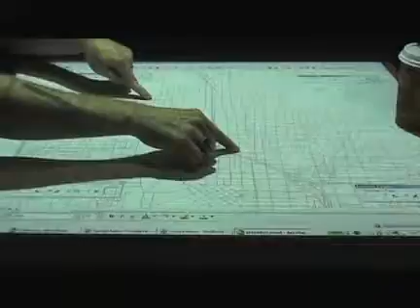So this is the DiamondTouch plug-in tool, and you can see it's integrated right in. With that plug-in tool, we now have some iPhone-style two-finger zooming, or this is a pan gesture. But the interesting thing is that multiple people can work at the same time. Oh yeah, you can pan too, right? Okay, yeah, that's pretty cool.

But if you drag one finger around, you'll see that I'm putting down a road, and he's putting down a path, and you can do this at the same time. You're putting down a bus line, or I can be putting down these highway markers here. And he's got an area tool there. So we can all be working at the same time here.

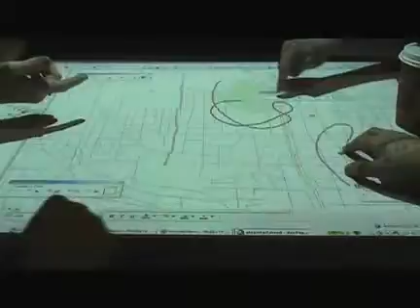And what's happening here is, you can see over here, there's a database. These aren't just graphic elements. These are actually features that are being geo-registered, but they're registered by user.

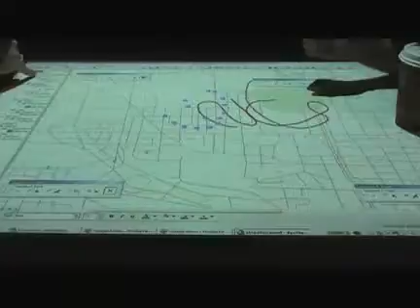So for example, I could turn your layers off — if I can just borrow the mouse for a sec, sorry — and just look at the stuff that I did, or turn mine off and look at what you guys did. Or we could even build a timeline. Everything's time stamped, so that we could build a timeline that takes a look at this interaction session over time. Huh, that's pretty neat.

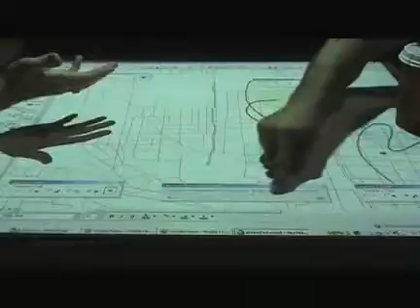So that's kind of what we've done for GIS, and our plan is over time to come up with plug-in tools for other markets. But I like GIS because people tend to work in small teams, and I think it's a natural fit with the multi-user capability of DiamondTouch.

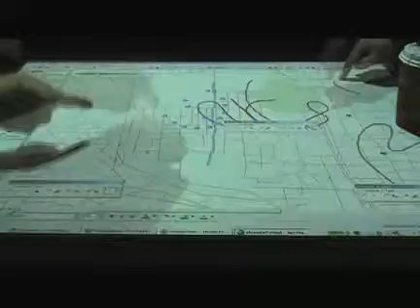Oh, here's an interesting thing. So here's my delete key, right? So here I can delete my stuff, but I can't delete things that other people did. Huh. Because there's a record as to who said what, right?

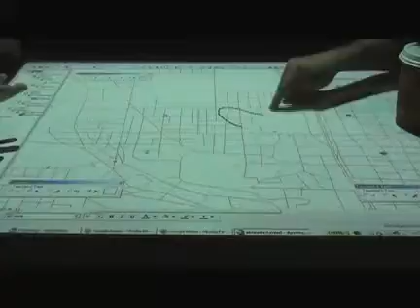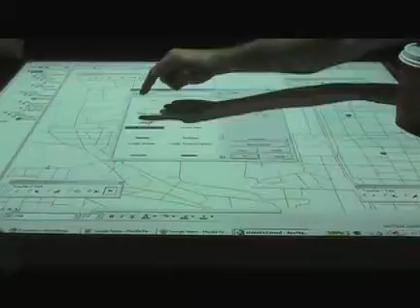So one idea is like if this were a planning session, a town planning meeting or something like that, and somebody said, hey, there ought to be some sort of handicap facility right here. Three weeks later, you could have a record as to who authorized that, because again, we know who did what. I can see where this would be really beneficial in like a command and control military type situation.

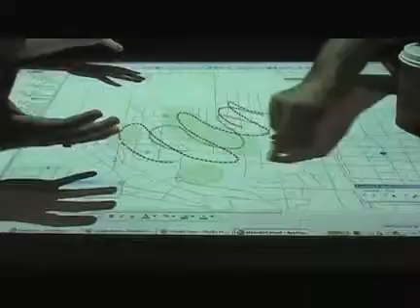That's where we're getting a lot of our traction. People who want to make decisions — this is where the decision making takes place, at a table like this. People tend to work in small teams around a horizontal surface like this. And by enabling everybody to work at the same time, you don't have to take turns. It makes it a lot more natural of an interaction.

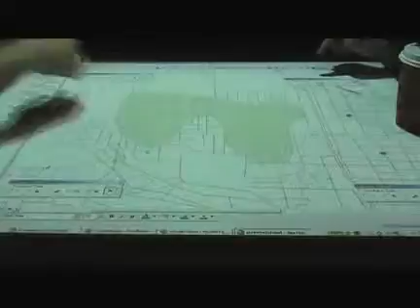So is this the largest table that you guys make? It is. We have two standard sizes. This is a 42-inch right here. We also have a 32-inch diagonal. The reason we chose these sizes is our target is small group collaboration, and here I can reach everything.

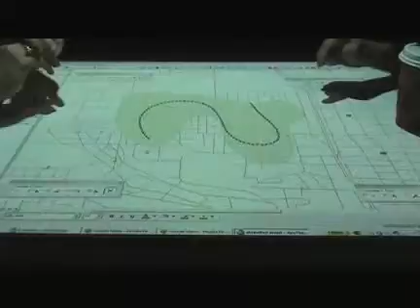Now, we have talked to some people from the intelligence community about making a great big one, and it might be that down the road we get a contract to do that, but right now our target is small group collaboration.

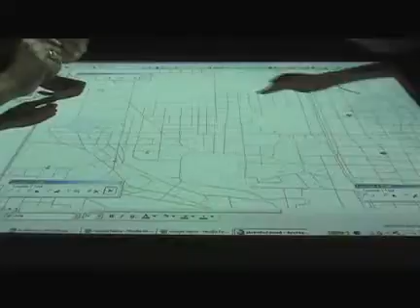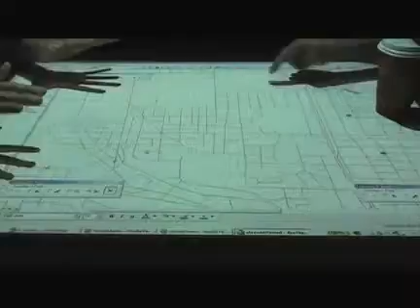An interesting data point we got is that 70% of all business meetings take place between two or three people face to face, and the fact that computers don't support this most common form of interaction between people is really the motivation behind this product, because we want to support small group collaboration.